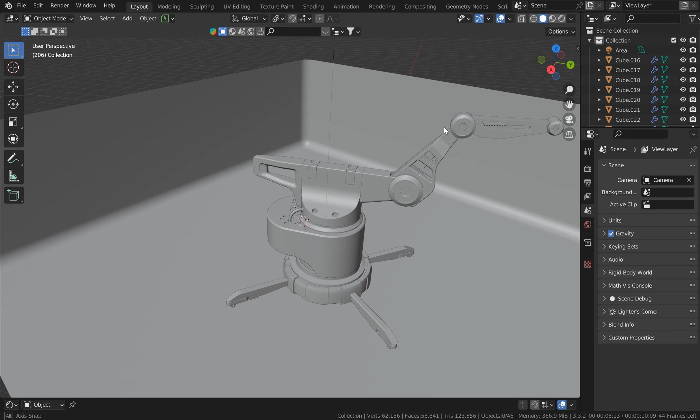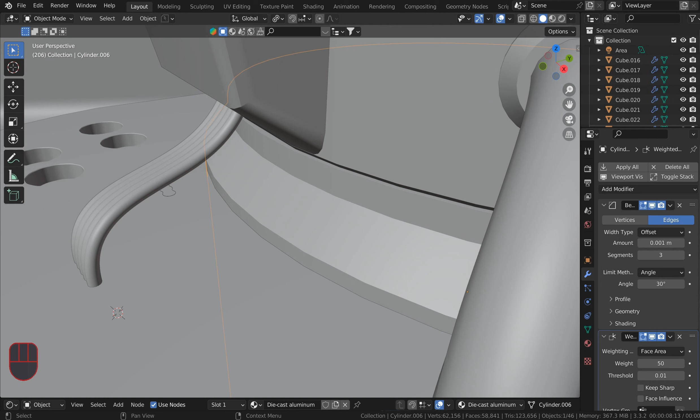Guys, Steve back, and I've been doing the Blender Bros hard surface modeling tutorial. Now I've taken a couple of liberties with this because I actually did about 99% of this in vanilla Blender with just boolean cuts. I did skip the through cut because after about 10 videos I was getting tired of putting cubes in, but I highly recommend it. The cool thing I figured out doing his tutorial, which is absolutely free and it's a masterpiece if you don't do hard surface - knowing how to model things out and bevel them and get flawless shading is going to be really important, not only for the overall look of the model, but for texturing. It's going to be huge.

I started out with Josh Gambrel, and I just kind of look at him as the vertex cleanup guy. He's so cool, he's just calm. He's just going to tell you everything you need to know. So when you get done going through a few of his videos, you're kind of like, I want something else, and you find the Blender Bros tutorial. I'll actually link to it. I don't think they're going to care.

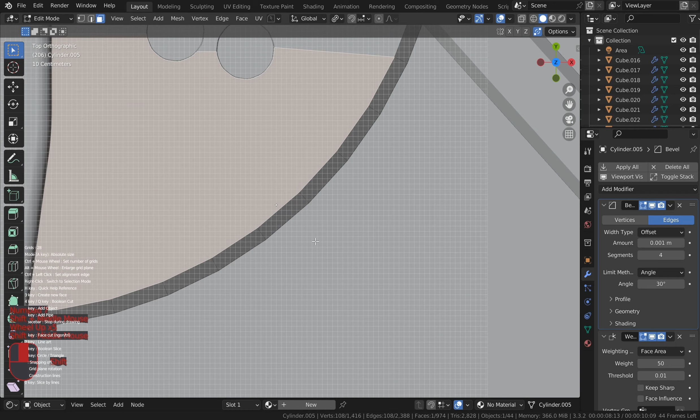What I want to do is run over a couple of extra things I'm going to do to this. I've got a hard surface modeling program that I really haven't used much - it's called Grid Modeler. It's not super popular by any means. And hard ops is actually going to be one of those things I think is going to be my next move. But I can come in here and do a ton of different things.

Like, I want to run a bevel on this and increase the segments down here, and I'll just click it. You can see - well can't see it now - but if I hit B, you can see the segments there about where I had the mouse, and then you can pull this out and bevel it. Actually I'm going to get rid of that and do another one because I kind of double beveled that, and that's not good.

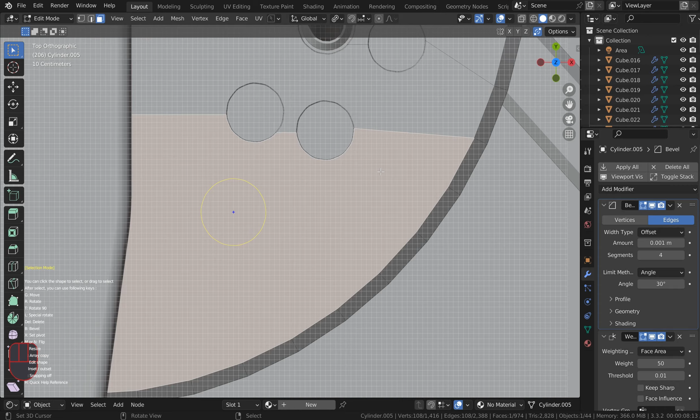Let's just do this - and I'm not trying to teach Grid Modeler by any means. What I'm going to show you is, if you get into the cleanup stuff, I can just go ahead and cut a boolean here. I actually have a pretty crazy setup to get the other boolean to function the way I wanted it to. There we go, and kind of play around with this thing a little. Yeah, it's a pretty cool program.

And if you don't have a hard surface program, easy stuff, right? You can just cut a boolean and make your own, and kind of adjust this. It's kind of bugging me out a little bit. Maybe 3 looks good. There we go. So you don't have to do it this way - obviously there are quite a few ways.

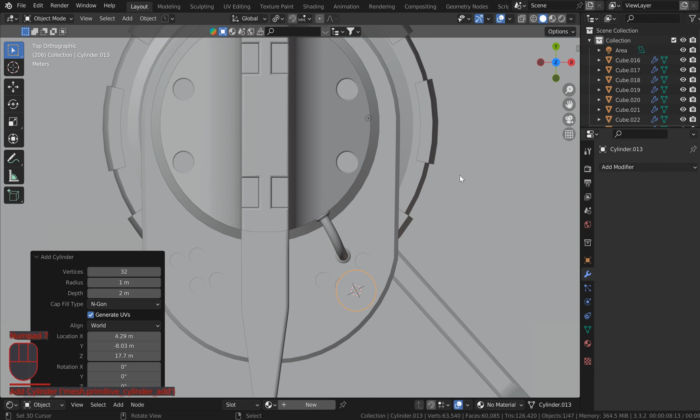So if I just hit Shift A and drop in a cylinder - this is something I didn't know, I mean you don't know until you know, right? And if I scale this down to something like that, I'll bring it right about here because I've been making a few cuts.

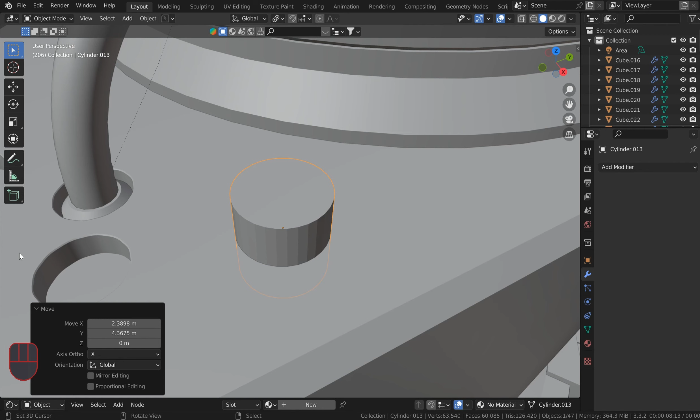And the thing is, if you drop one of these in and the segment count isn't high enough, you're going to cut a really ugly boolean. I don't really like these - these were with the Grid Modeler. I didn't bevel them enough times.

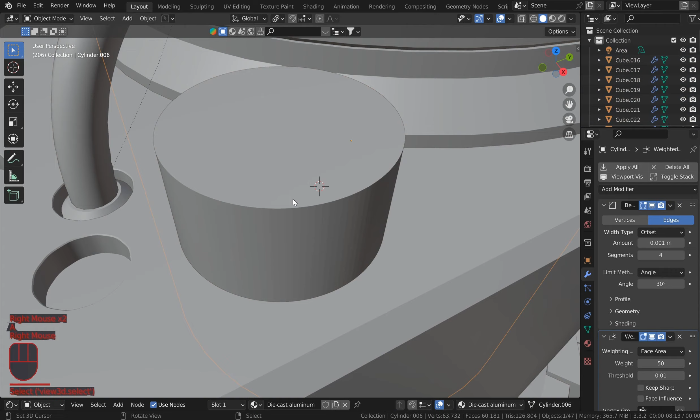So I'm actually going to just quickly delete that and add in another cylinder. Right here, you could put it to 128 if you want to get kind of crazy, but it's going to look good, so that's good for me. I'm going to hit Shift A - if I make sure I can just select that. Excuse me, Control A - applying the scale is one of those things. If you don't do that, your bevel is going to be torn up.

So let's go ahead and bring this thing down, scale it on the Z just a little bit because I want to use Cablerator, which I've been using to do this. I've been using Cablerator for a while, and I kind of got off track because I was using the BagaPie cabling. It does not compare to Cablerator.

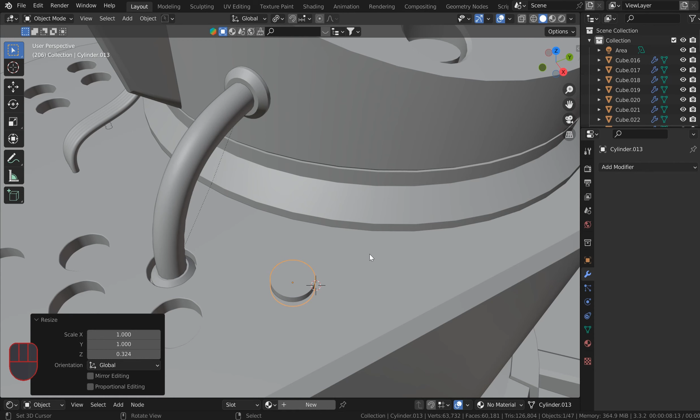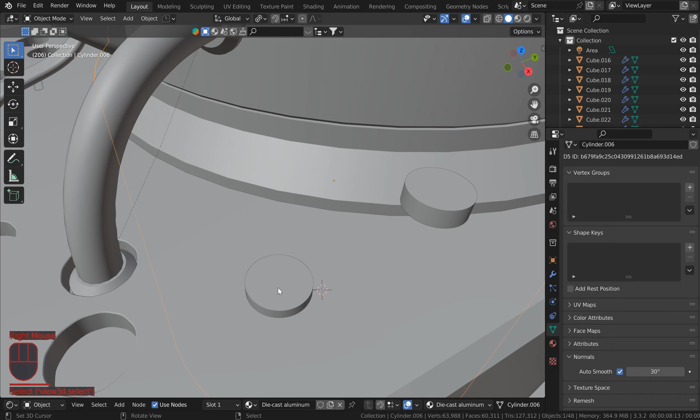Cablerator is insane. So with this, if I'm going to cut a bevel or a boolean, I actually want to Shift D this because I'm going to use that for the segments, since I want to make it twice. Now we shade it smooth, and then it's important to come over here and auto smooth that. If you hit slash with that selected, you can isolate it. I'm now using MACHIN3tools, which if you don't use, it's going to be pretty helpful, so you might want to get in there and use that.

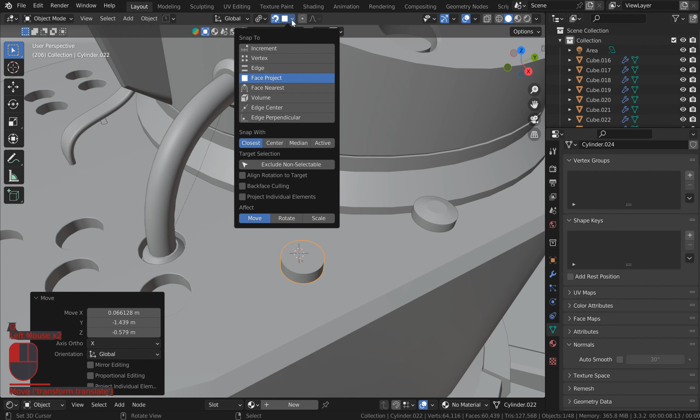I'm going to run a nice chamfer right down here. That looks pretty good, and I don't see any issues. I'll just slash back out. Actually, that one's going to be the other one, I'm getting ahead of myself here. I'll snap that back to the grid with the famous magnet snap, and bury this down a little bit, right about there. That's where I want it.

So now I'm going to Control A and apply the scale, then Shift right click, Control minus, and offer up a nice little boolean. All right, now we've got the boolean cut and the cable is in, but when we select the mesh we see we've got these two edges here.

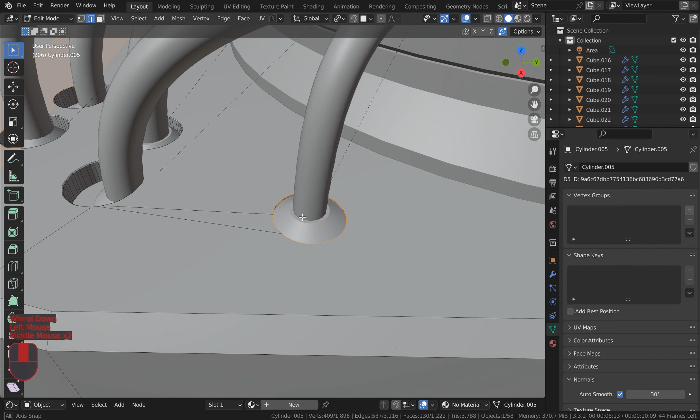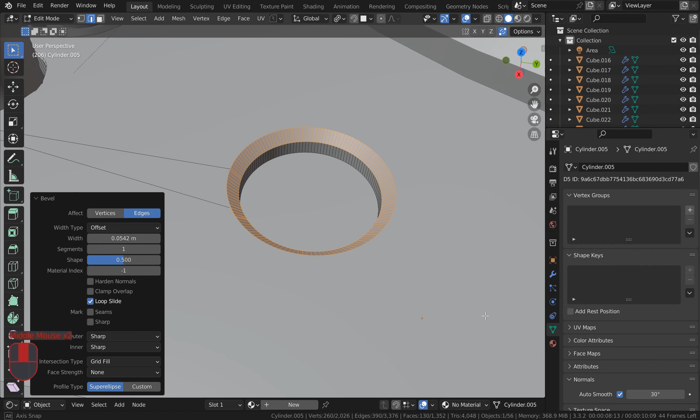That really don't line up with anything. So if you were going to come in here, I'll just hide these. I'll come down to edge select and grab this top edge here, and try to deselect what else I've got. Then if you hit Control B and bevel this, you've got that edge there, and it's going to cause some problems and shading issues, and you're really not going to be able to get this chamfer. You see how this one's lining up as well. It's not going to end up looking too good, and you've got these funky cuts in here, effectively creating artifacts. I don't even want to try to clean all of that up.

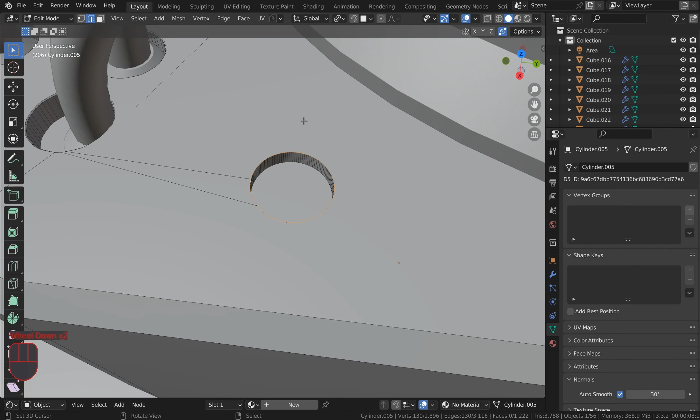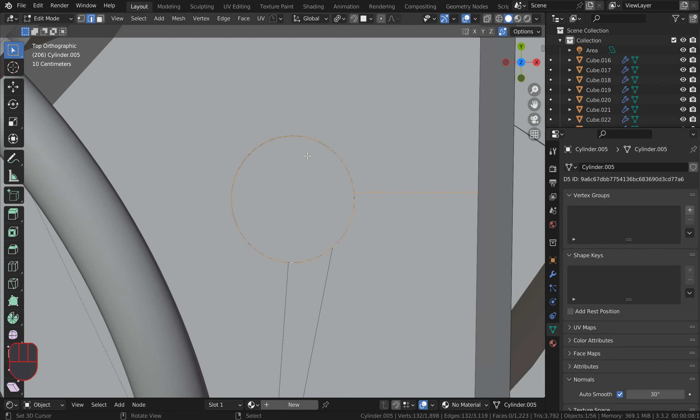The proper way, and I'm going to Control Z back, is to create some new geometry to support this. So let's take a top view. If you're just cutting it into a cube or something, you can definitely follow along. What you do is pull up the knife tool in edit mode, hit K, select a point and then hit A, and that's going to straighten it out, then just hit enter. What works best is a straight line going into your boolean cut, and you need two of them for Blender.

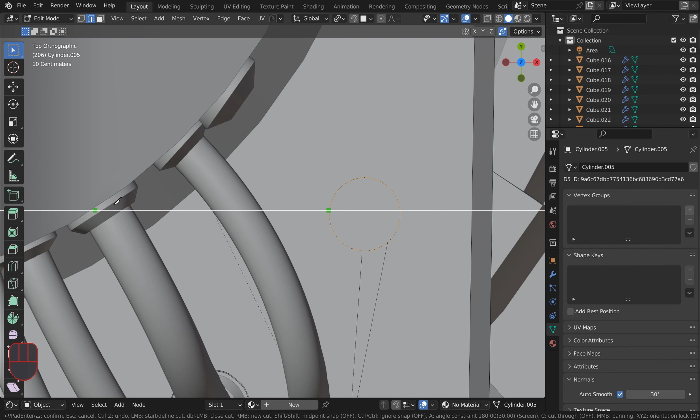So what I would do now is I can probably safely get another one right here, and it doesn't necessarily matter where they are, so I'm going to keep going, and I'll hit the knife tool here and hit A for that perfect straight line. I just want to jump over into wireframe. Yeah, so I tagged in a good spot there.

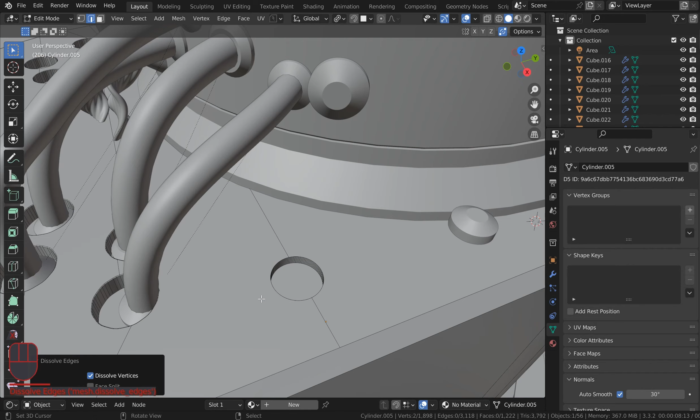No problem, I'll come back to solid view, and now I'm going to tab over and grab these two and hit X, and I can dissolve them and get rid of them. So now this will be clean, and I haven't cleaned up any of these, but this one will be clean. So now if I come in and grab this with an edge select and hit Control right mouse and grab that entire loop, it looks like I might be missing one piece here, let's deselect that. And if I run my chamfer now...

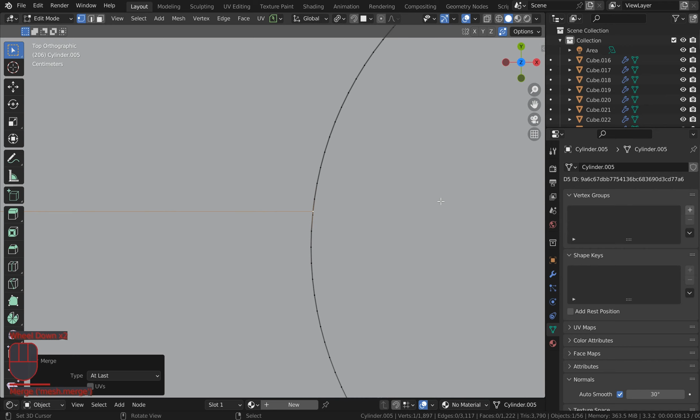I apparently get something a little bit wild. Let's see what is going on here. I must have double clicked or something there, but anyways, no big deal. I can G, double tap, and slide that and kind of straighten it up, then Shift right click there and hit M and merge that at last and clean that up, jumping back over into edge mode.

So that's one of those things, like if you work with Josh Gambrel, you'll be able to do all that, and you go, oh, there's an answer to it. There's always an answer. So now if I want to put a nice little chamfer in there, look how nice that looks. I'll just go back into object mode. Yeah, not too shabby.

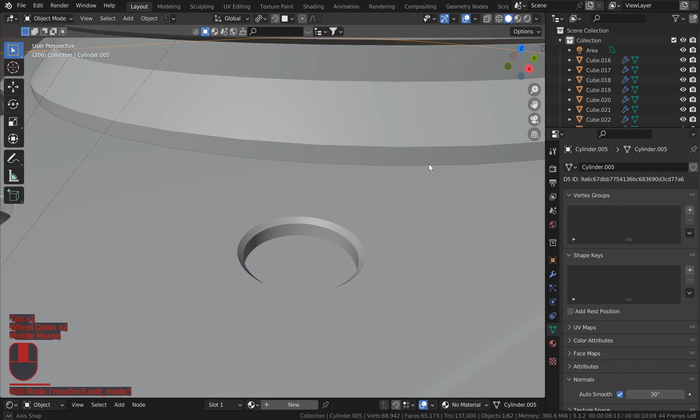And if I hit Alt H and bring all that back, now that actually looks a heck of a lot better. Of course, that's just one of a dozen things you can do to enhance your boolean cuts and fix them. Just like in the tutorial, I'm going to hit M and drop that into cutters.

And then if I come down, I actually need to apply said boolean, since it's below my weighted normal, so I just need to bring that boolean up. There we go, and that usually corrects shading issues.

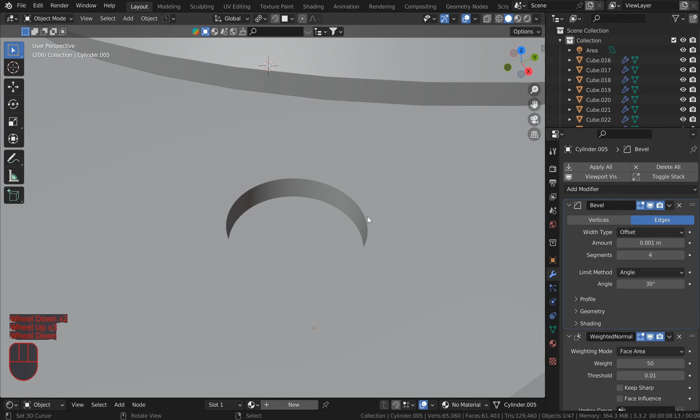So now this looks really nice, and I can go ahead and apply that. You do have to move that above your weighted normals if you're using them, but just like I was saying, go through the course—not going to try to teach any of that here.

The big deal here is that once you get Cable Rigger, you will literally be ahead of the game. So I'll just go ahead and create a cable. I'll select my first point.

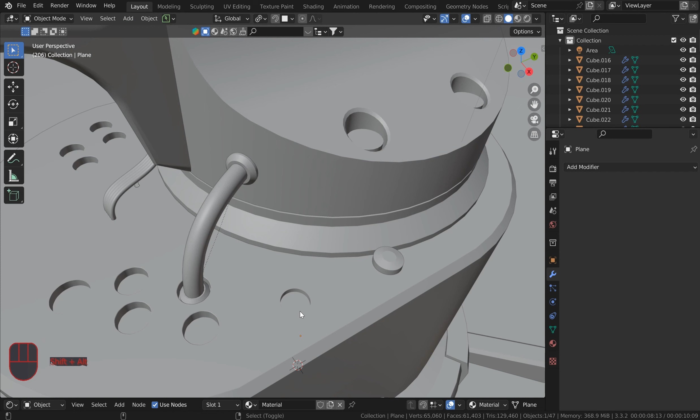And then you can draw a cable or you can create one. It's a pretty deep program, so I'm just going to create a cable. Just left click here and find the center, or close, because it doesn't matter—you can adjust all this later.

I'll hit S and you can scale it up a little bit. You can hit D and create some tension, kind of move it around. You can change the profile too, but I'm not going to do that on this one.

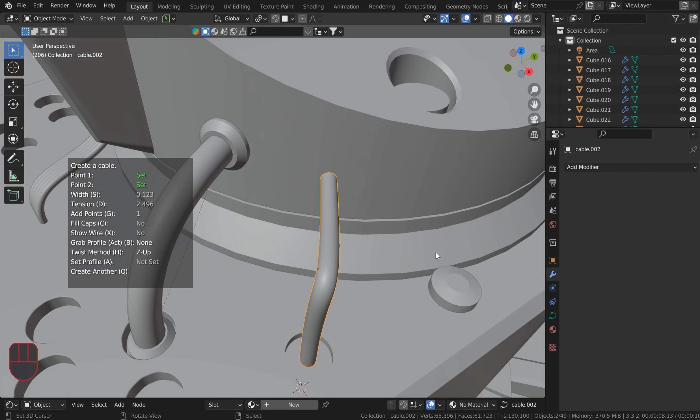I don't like that tension, though. Right about there is good, maybe. And I'll scale it up a touch more. Okay, that looks pretty good.

Now you've got to left click out of that, because if you right click like you would normally do to enter back into the 3D viewport controls, that's not going to work.

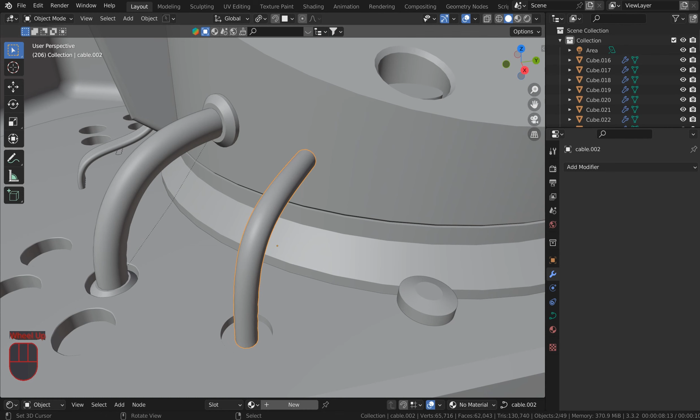Now let's say this one is just a little too big. So right about there, and I will apply the scale.

And it looks like I beveled that way too soon. Let me just go to face mode and see what's going on with this thing. G and Z—there we go.

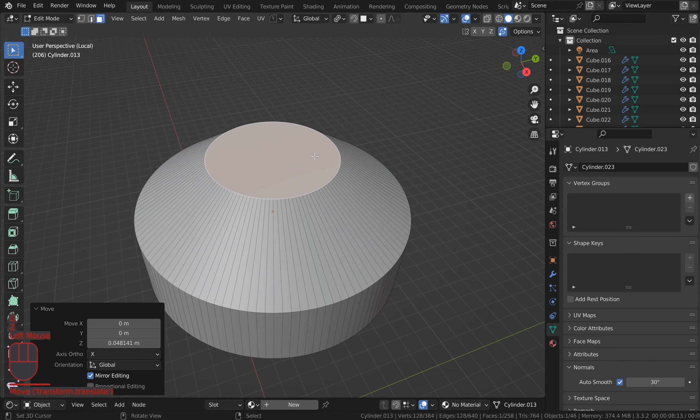I think I just popped that back out. Yeah, there we go, that looks good. So I just kind of messed that up.

So that looks good. Now what I want to do is put this in as a cable connector, right? So I would just right click this, shift right click the cable I just created, jump into edit mode, and then Shift Alt C again.

And now what I want to do is add connectors, and it'll add the connectors. From here, you don't want to click out of this menu, because this one's pretty important—you can hit T and scale it, because hey, guess what, it may not be perfect, and it's probably not going to be perfect.

So if I just want to fill that, I mean, I could, or I could leave it a little bit lower. I think right about there looks pretty nice. I can press A and flip the direction if I don't like that, and then I can hit T and scale that down again. So you can do a bunch of different things here.

Now you also have some offsets. So if I hit D—let's press middle mouse, because that's like the safe way to get back into this—I can offset these connectors a little bit if I want to kind of bring them in to the mesh that I'm working with.

And I'm actually going to flip that because I want those back, and I will hit T to scale that back up till it looks kind of good.

Okay, I like that. Now the next thing that you can do here, I'll just take on a... there we go, the button wasn't working for some reason.

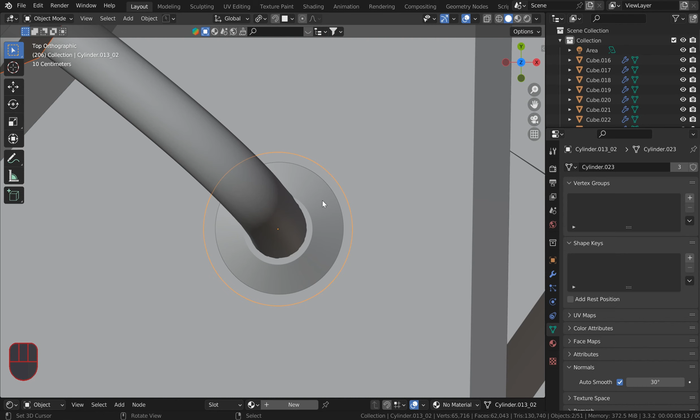So now I can just grab this. I'm kind of out of that menu now, so it doesn't really matter. But if I grab this and kind of move it around, you can see that my curve goes with it.

So these are objects which are indeed parented together, and you can move this thing anywhere that you want.

Now, one of the cool things is you can create different cable profiles. Let me just get rid of that segment, Shift Alt C, and I create a cable from here to here.

Now what I can do is I can grab that profile by pressing B, and I can change this. At this point, you can scale these.

You can do a whole bunch of different things and change the tension as well. You can also show the wireframe, so if you're using the tension here, you can see when it creates shading errors. Obviously there's shading errors there, but you'll see where you're kind of stretching the mesh. If you're doing too much, maybe you need to use a different option.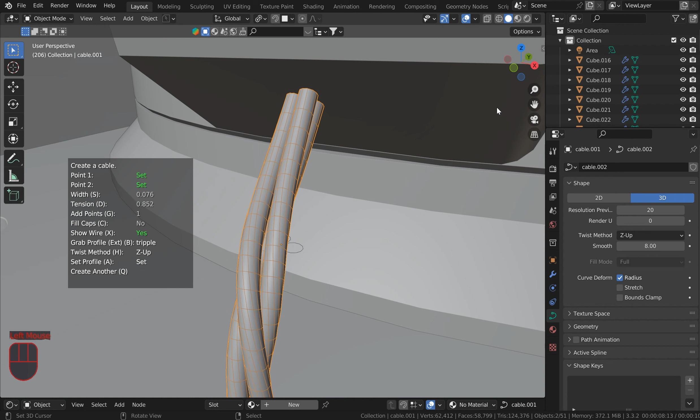Once you've done that, you can switch it maybe if you want again by pressing B, and you could get something like this cable here, which I really liked.

And then if you want, you can change the actual twist method, and you can hit H and straighten that out, give it a little bend if you want.

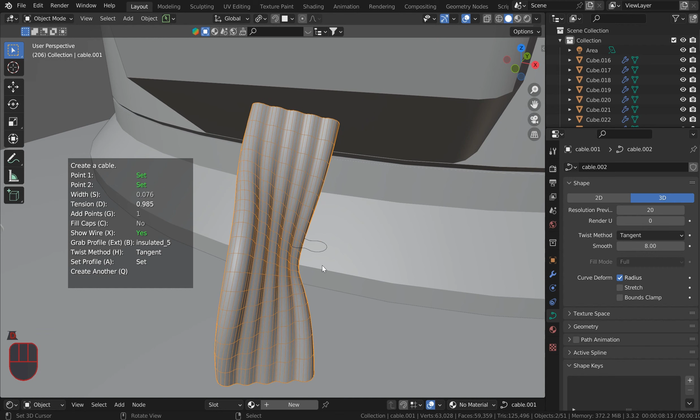And then of course the tension, if you press D for the tension, it works again. I do like working with this in the wire, I guess you can call it a wire. It's not necessarily a wireframe mode, but you can definitely see the geometry and how it's going to end up looking. I really like how that's starting to look.

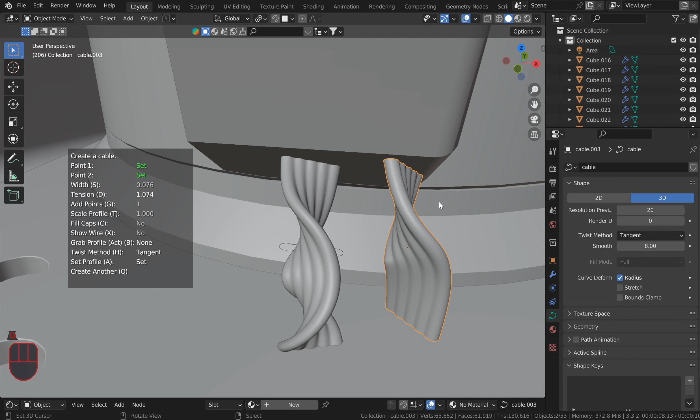Now another thing, if I go ahead and hit Q and pick two more points, it's going to put another one of these out. And so if I like that, I can get close to the dimensions again, and you can start replicating those if you like.

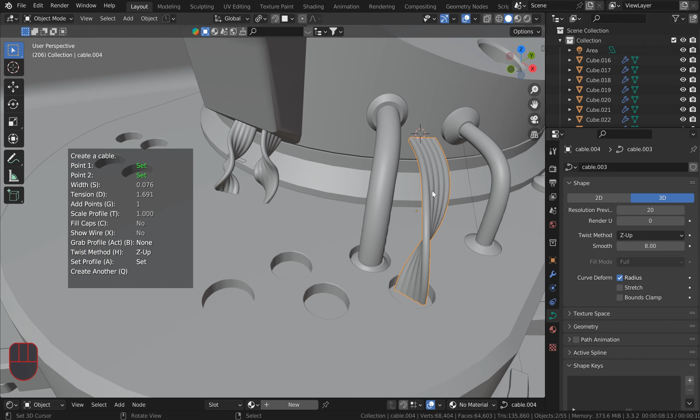Now the cool thing is, if I hit Shift Alt C and maybe just take on a slightly better view, I can start putting these cables in. I didn't really want that one, so there we go. Kind of scale that, and then Q works very nice here to go ahead and start putting your extra cables in.

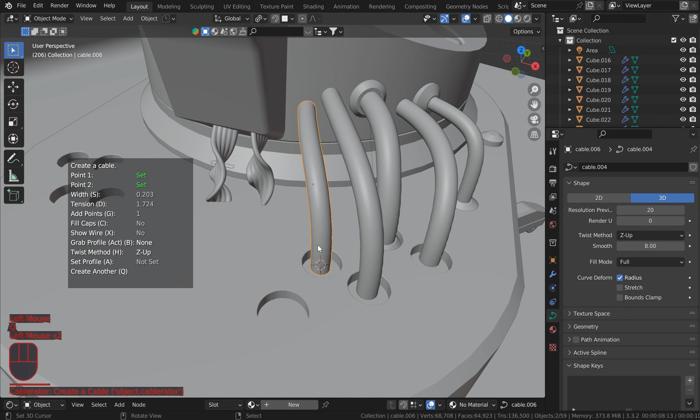And if you don't like where something is, you can move it around a little bit, and you definitely see if you've got the shading errors going on. So if something's overlapping, you could definitely move it. Now that looks pretty good.

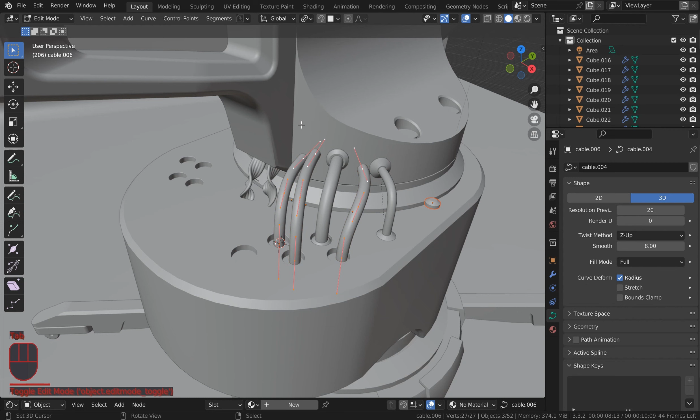The final thing I'm going to do is click on here, and I want to add the connectors. So as long as the connector is the first object and the final object is of course a curve, then you can jump into edit mode and add connectors to each one of these. And then you can go through the list and start scaling these up.

And don't worry, like, oh, you scale this and you don't like how that looks. Well, once I do this, I can kind of move them around and situate them. Of course, I can still scale the individual pieces. And if I don't like how this is, it's kind of crappy, right?

I just come into the top view and the curve object goes with it. You kind of center it in and do pretty much anything that you want.

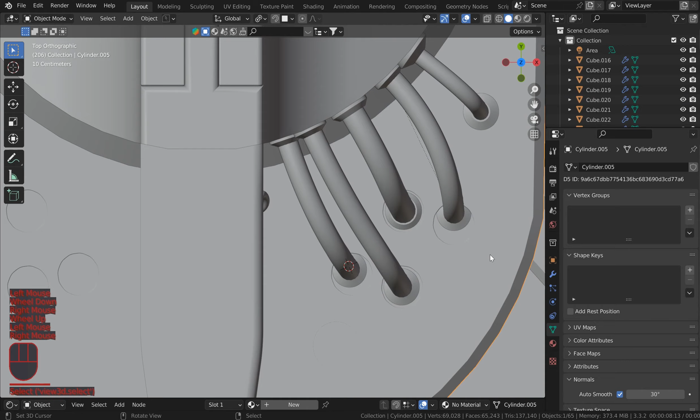So anyways, guys, just working on this little project here. It's been a ton of fun.